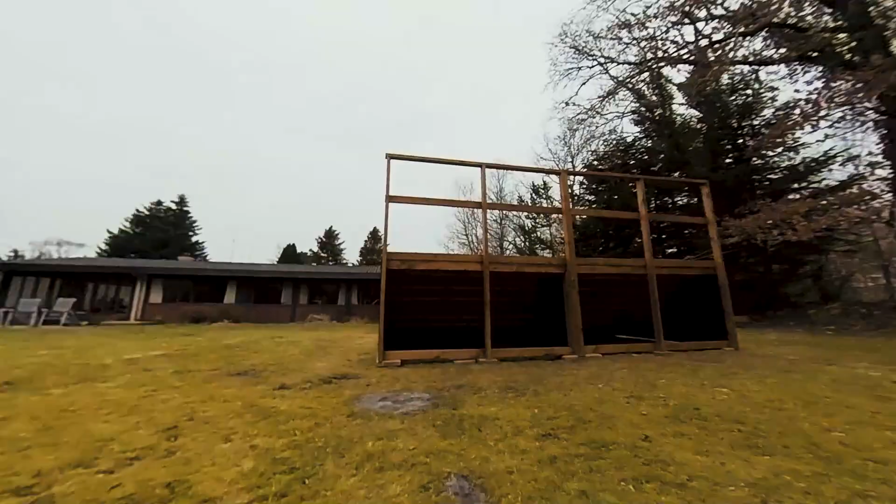On the last video on our channel you have seen the perfect mini ramp we built in our backyard. And in today's video we're going to show you how we build it. We have quite a lot of ground to cover, so I will put timestamps in the description if you want to jump into certain part of the video.

I will start with the plans and drawings, how I designed the ramp and why it is like it is. Then I will talk a little bit about the materials and how much money did I spend on what. We will talk about how to prepare the plywood and other material, what tools did we use.

We will talk a little bit about the foundation and then just continue into assembly, how we assemble the skeleton, all the quarter pipes, how we install the coping and everything about the plywood and finish. So stay tuned and let's go for the plans and drawings.

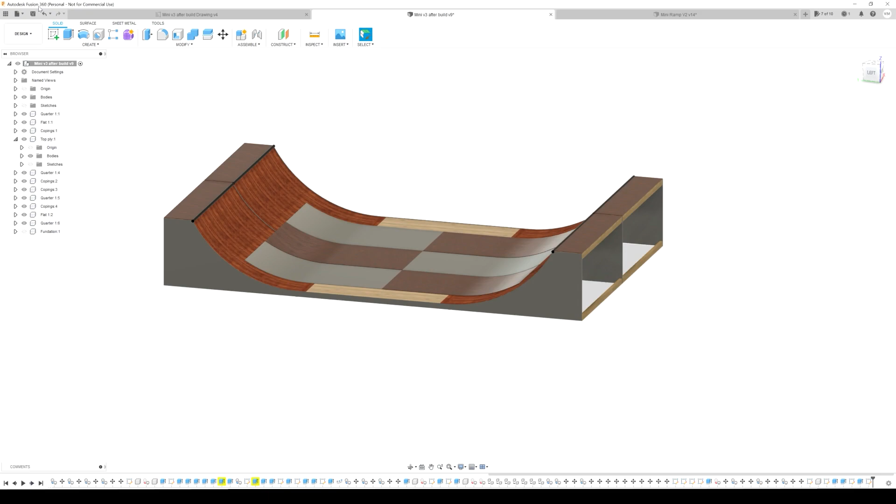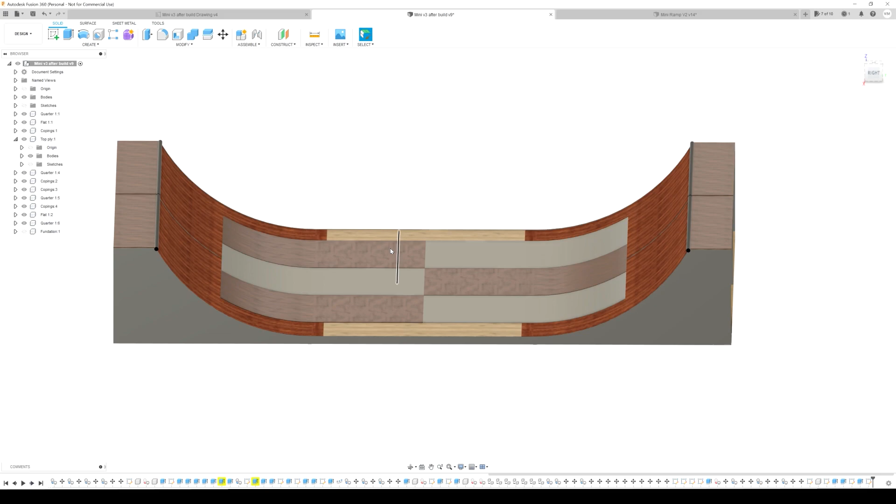So this is my plan of my ramp. You can make your plan with pen and paper or any other application. I use Autodesk Fusion 360 just because I'm familiar with this application and I use it for other activities and projects as well. If you want your ramp to be sturdy and stiff and last for many years, you will need to have a total of 18 millimeters of plywood covering the entire surface. So 18 millimeters here, 18 millimeters on the flat part and 18 millimeters on the platforms.

The platforms can be of different size, and actually in reality I have one platform bigger than the other, and I actually have even a bench made here as you saw in the video. These you can add on, so you can see that this ramp ends here and that platform is just an add-on which you can change to whatever size you like. So I'll just stick to the basics right now.

So how do you put 18 millimeters of plywood? Well, before you add any plywood on your mini ramp, you will have several decisions to be made. So first of all, you will need to decide how tall your mini ramp will be, what will be the transition radius, and also how wide you want your mini ramp to be.

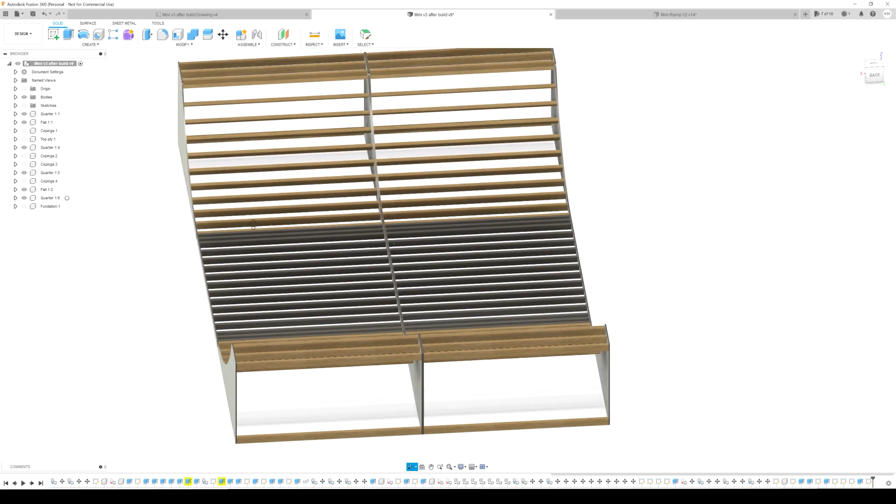So my mini ramp is made to be pretty soft when you drop in. It's not intimidating. It doesn't have any vertical transition right here, as you can see. And the circle radius is 2.2 meters. If you want your transition to be nice and soft, your transition radius will have to be more or less above 2 meters. 2.2 meter transition radius is the ramp that everyone can ride. Beginners don't find it scary. I myself pretty much enjoy it.

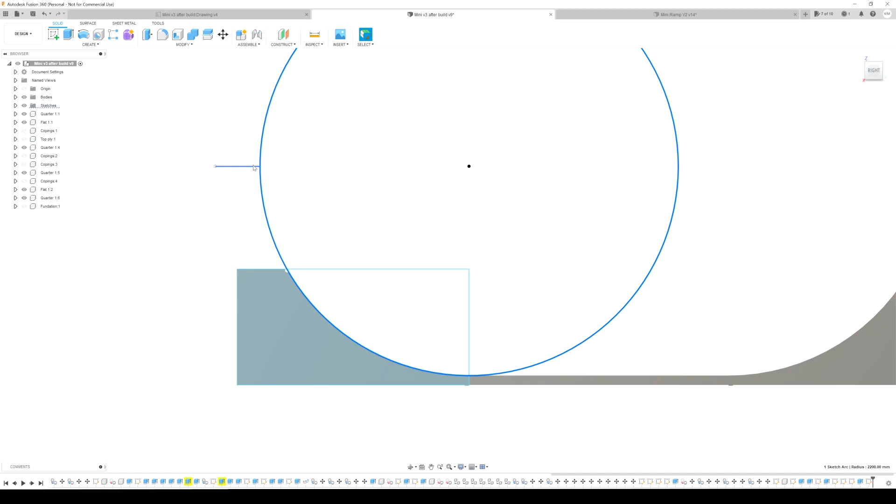I know that some of you would like to have it vertical, but then you will have to increase the height of the ramp a lot or go for a much smaller radius. So if you go with a smaller radius, then you can make this ramp work, but you have very steep transition. So when you define the height and the transition radius, then you can start thinking about how wide your ramp will be.

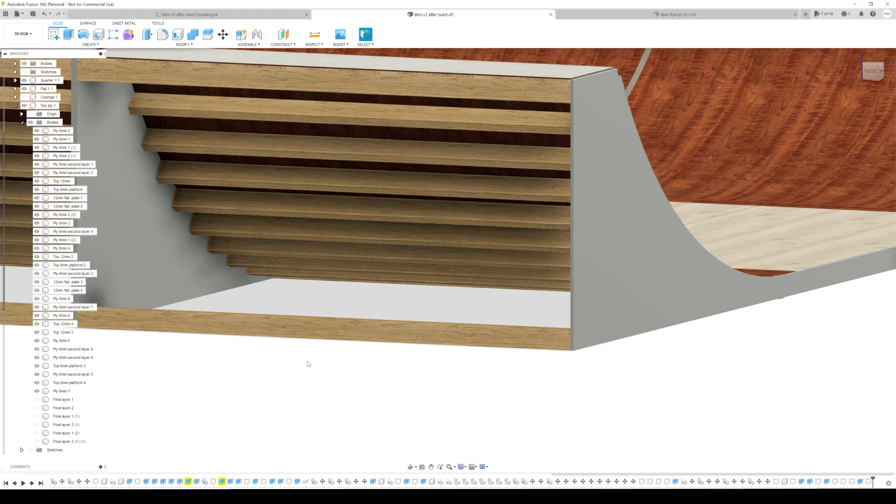The width of my ramp has been defined by the materials. I could get these in 2.4 meters long. I could actually get them longer, but I think this is reaching the limit of how wide you can go without making the ramp too weak or buying these much thicker, which would increase the price of the ramp a lot. And also the dimensions of the plywood. So the width of the plywood is around 1220, so two pieces make it 2440, and this is 2400, and this is exactly how I decided how wide my ramp would be.

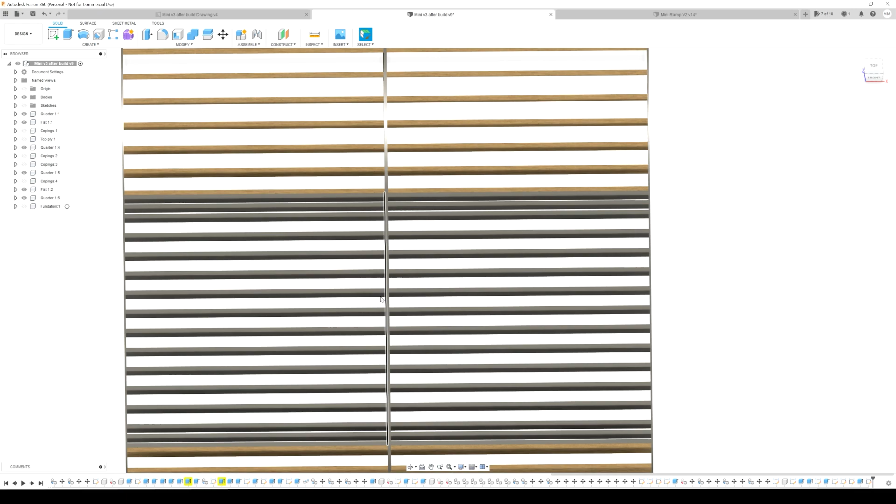One thing to remember when you plan for the width of the ramp and you calculate the material sizes, is that there are actually fluctuations in the plywood size and also in every other material. Another thing to mention, don't forget that the last layer, the final layer of the plywood, will have to cover also the walls. The walls for the transition for my ramp are built out of 15 millimeters of plywood.

So you will have two sections of 15 millimeter for every quarter pipe. So you need to add 30 extra millimeters overlap to be sure that the width of the plywood of the final layer is sufficient and you don't have a 15 millimeter gap at the end.

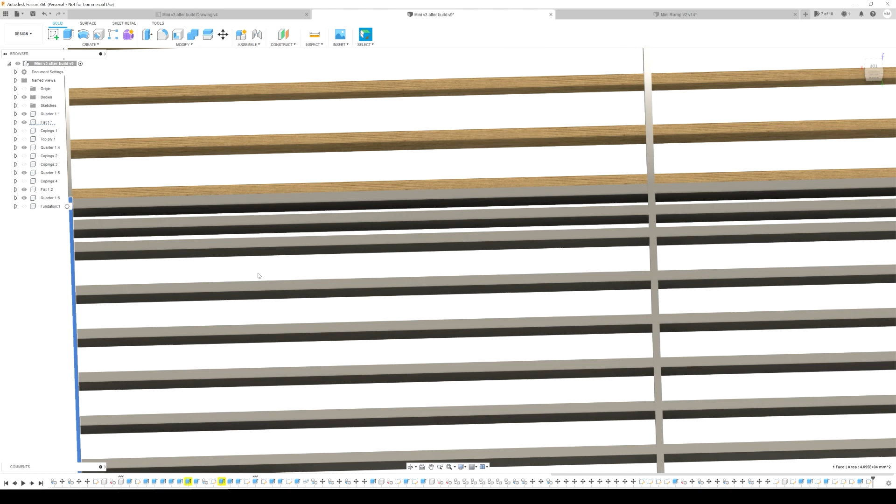Alright, so by now you have decided how wide your mini ramp is, how tall it is, and what the transition radius is. Now the next question you need to answer for yourself is how many of these horizontal planks you will need. You will definitely need one at the bottom for every quarter pipe. You will also need one at the other end right here where the transition ends, flush at the very end.

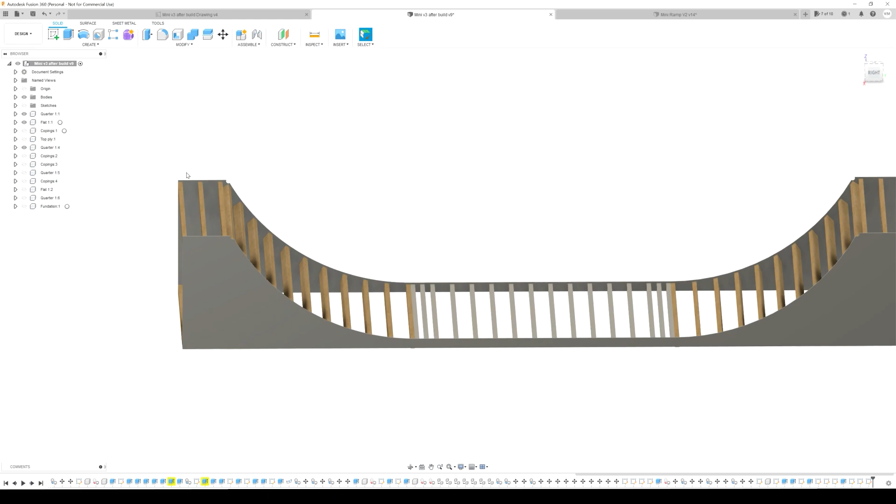And then we installed one every 20 centimeters, 200 millimeters between the centers of every plank, both here on the transition and also on the flat part right here. You might notice that there are some extra planks on the flat part right here and right here, and these were installed during the build of the ramp.

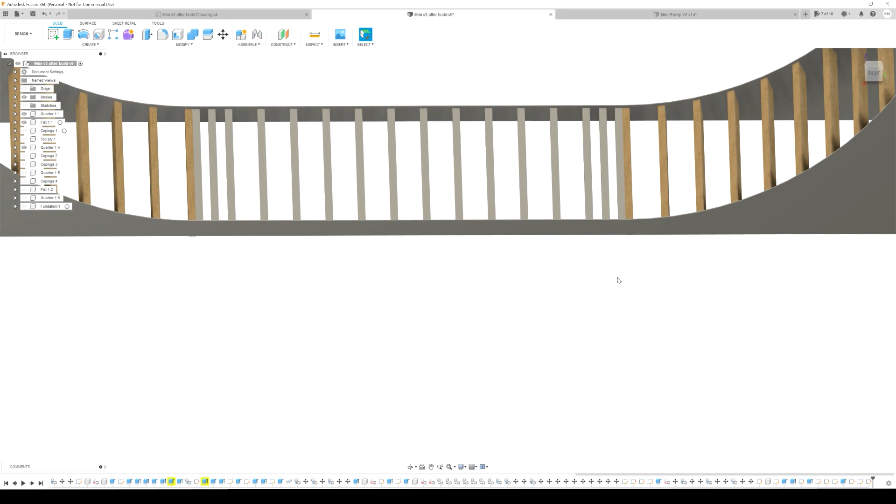I didn't actually have them in my plans, and we had to install them because this was the place where our plywood was overlapping. The sheet of plywood was coming down from the transition, and this is where it was ending. So we had to add something to put the screws in to fix the end of the plywood in place. This was bad planning by me, because I didn't know how we would install the plywood, but something to be mindful about.

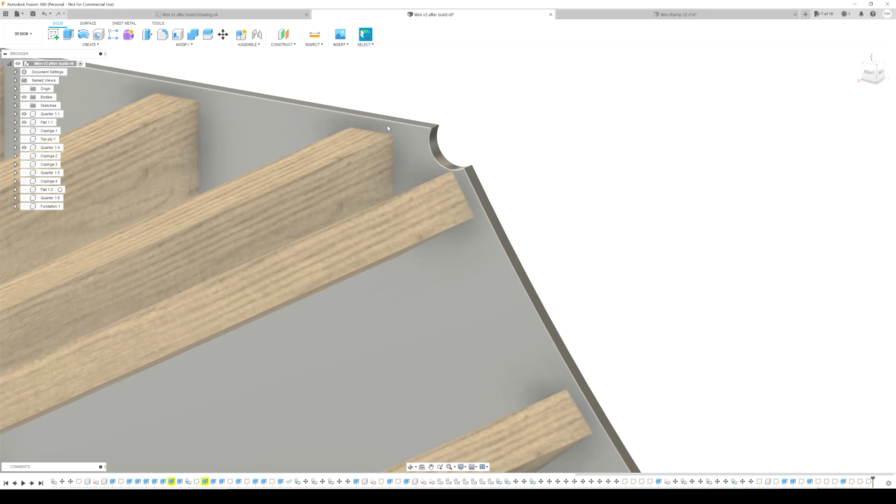Now let's go back to the topic of installing plywood and 18 millimeters of plywood. As you might be able to see already, all of these horizontal planks are installed 12 millimeters lower than the wall of the transition. Why not 18? Because the last layer of plywood will be going over the wall, and the first two layers or one layer of 12 millimeter will go here. For all of the parts that are flat and you don't need to bend plywood, we use 12 millimeter plywood, which then makes it flush to the wall.

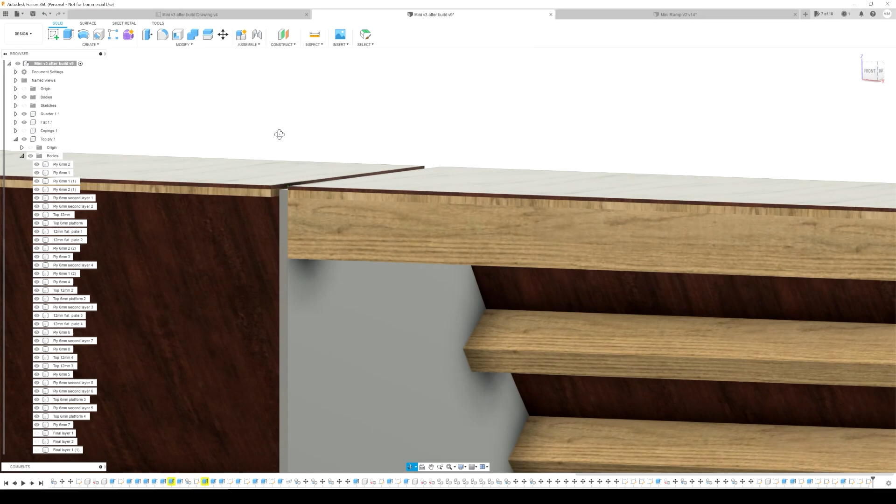So for example, if I just add the plywood, you will see that we have a 12 millimeter plywood plate just sitting here on the horizontal plank. And the same happens here on the flat part. You can see that we have it sitting here, and then it's actually flush to the wall.

Now on all the transitions, as you can see, we actually use only 6 millimeter plywood, just because it's so much easier to bend than the 12 millimeter one. And this is what I would recommend you do as well, go with 6 millimeters and 6 millimeters here, making it 12 and making it flush.

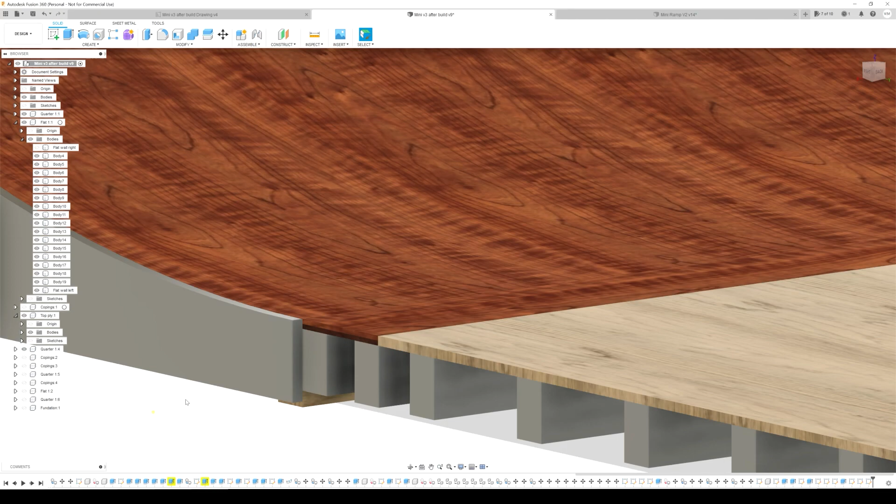Now when we actually installed it in reality, we encountered a problem because our plywood was not exactly 6 millimeters. We didn't measure it before we started the installation. It was actually only 5.5. So we had this wall sticking out around 1 millimeter, and we couldn't add the top layer. We had to sand it all down with the angle grinder.

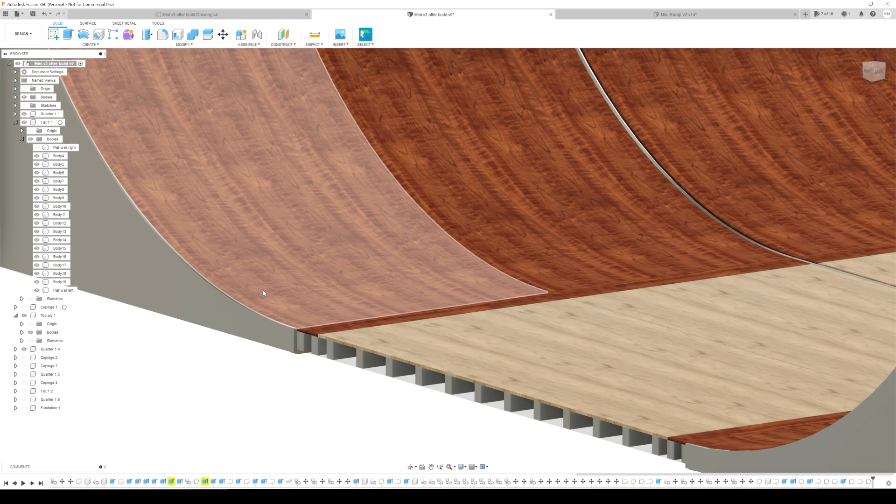So if that happens, you need to make sure that it's flush. Maybe it's less of a problem here at the edges, but definitely a big problem here in the middle, because if you add your final layer of plywood and something is sticking out here in the middle, it won't be good. You will probably break the plywood.

So all in all, you will have 2 times 6 millimeter plywood here, and as you can see, I actually used 1, 2, 3, 4 plates 2 times on the quarter pipes, and 12 millimeter plywood here as the first layer, and also on the platforms a 12 millimeter layer of plywood.

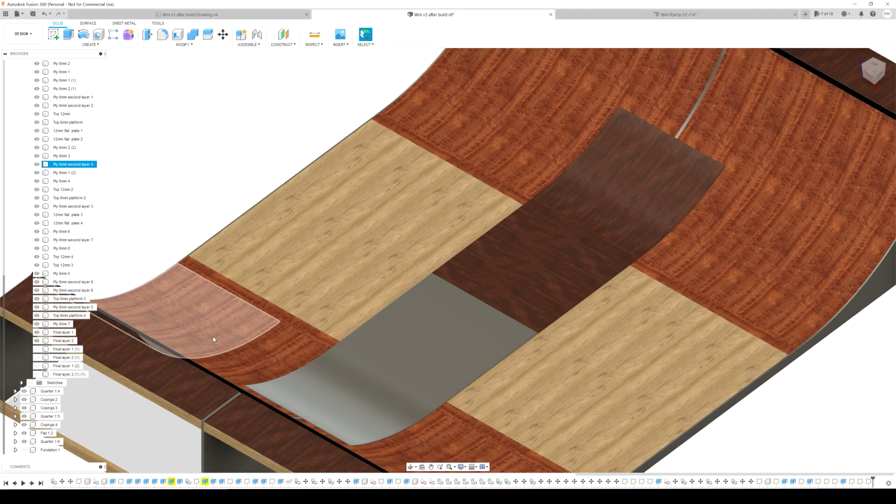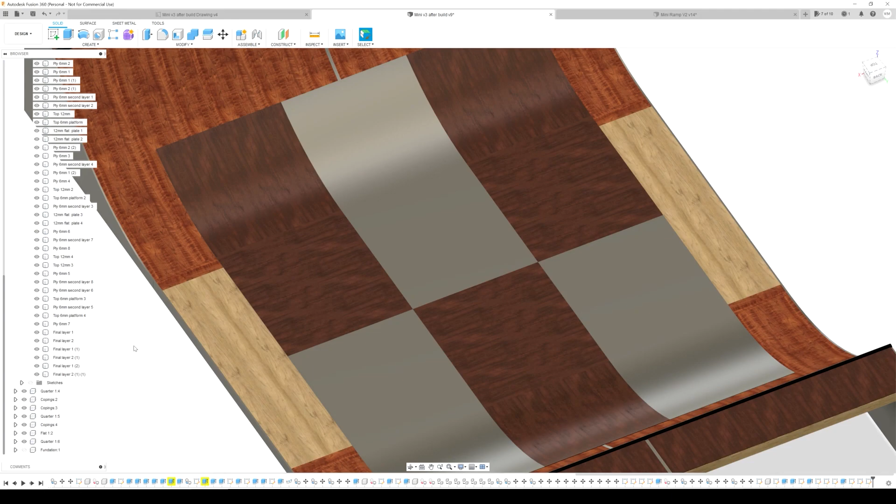And then for the top ply, we used again 6 millimeter hardwood plywood, and we started laying it down here in the middle, just like you see right here, really trying to make the first one centered in the middle and also make them flush with each other, because the more skewed you put the first ones, the more they will go sideways on the final ones. So we installed it like this, and these were full sheets of plywood, and then all of the ones that went on top here and on the sides had to be cut.

And it's important that you actually do that, because as you can see, the joint of the plywood is here, and this one is overlapping it. So you have to overlap it both in length and in width to make a strong structure when you build your ramp.

So right now we are looking at the list of materials that I used to build this ramp, and also immediately jump to the pretty much most common question: how much did that ramp cost? So all in all, I didn't have to pay anything for the tools, and I didn't have to pay anything for the work. It cost me around 3,500 euros. I live in Denmark, where everything is extremely expensive due to very big taxes.

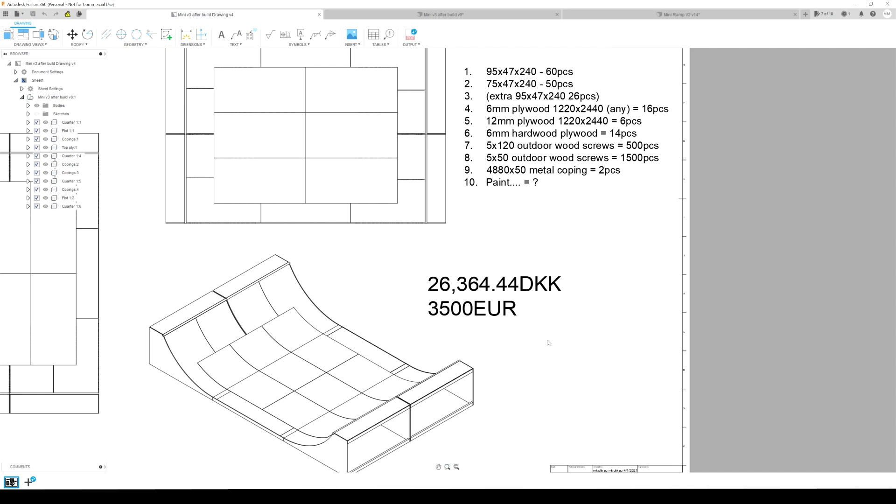I believe that anywhere else in Europe, and even more so anywhere else in the world, you can build it much cheaper. The materials are really expensive here, but you need to make your own list, make your own shopping cart online somewhere, and make an estimate. After you have a plan, it's not such a big deal. I was actually expecting to finish the ramp for 22,000 kronas, and I spent an extra 4,000 on unexpected things, which I will cover a bit later. But so this is the key list of the materials.

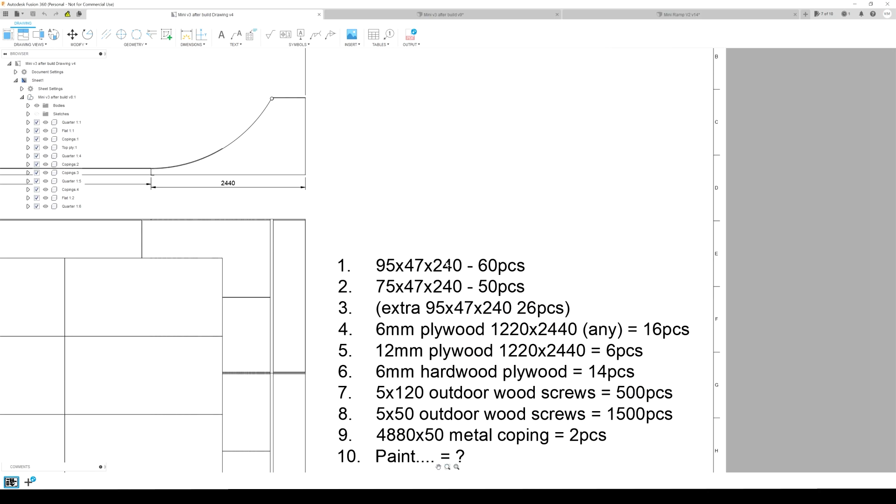The horizontal planks that I used were 95 by 47 millimeters. One important thing to mention is that these horizontal planks need to be vacuum impregnated with an agent. They need to be water resistant, and they will last much longer, especially in wet climates. And they were 240 centimeters long, 2.4 meters long. And I had to use 60 pieces of them. So I had a plan to use the smaller ones for the flat part.

Let me just get back into the drawing. Because we made these side walls smaller, I was expecting that I can use smaller horizontal ones here, but actually I ended up using all of them in the same size, 95 by 47. I just had to lift up the side wall a little bit so that the planks were sticking out like this, and my ramp is now standing on them, on the foundation, instead of sitting on the wall. So you would see all of them right here, just because I actually used 95 by 47 or by 50, you can find them, all 110 pieces.

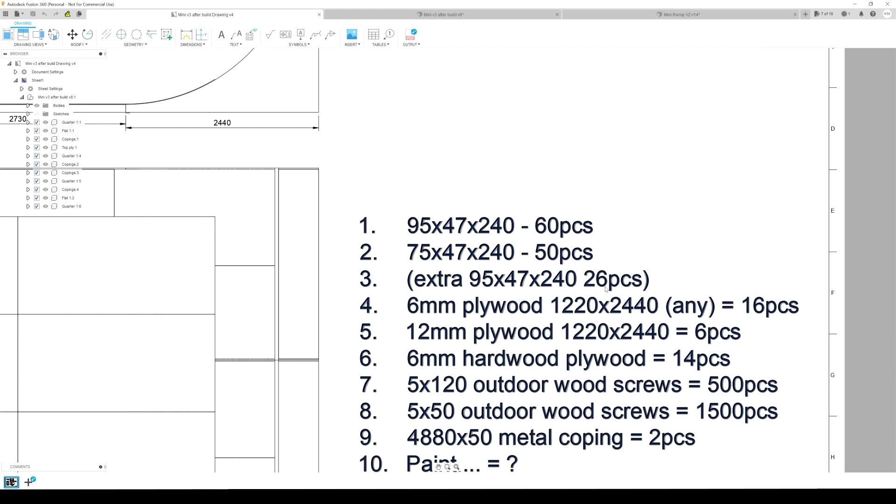Now I also added an extra 26 pieces here, which I used for the fencing. And you can see the fencing in my video, and also for the extension of the platform. So all of this fencing, and the platform, and this platform is, by the way, 1.2 meters wide, and also the little bench. If you want to build those, you will need some extra, so I had to order an extra 26 pieces. Actually, we used all of them, and I would probably use 2 more, just because I would need an extra one here right now, which doesn't exist. Let's continue on the material list.

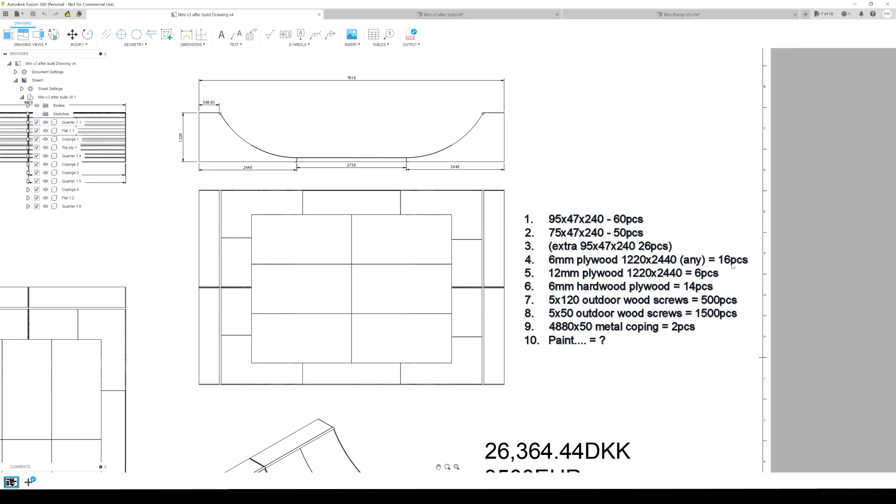You will need 6mm plywood. This is the standard size, at least in Europe, which you can get. And I put any plywood because you need 16 pieces for the first and second layer on the transitions. And it can be any plywood which is 6mm. And the same with 12mm plywood, so you will use 4 plates, 1, 2, 3, 4 right here. And I used a couple more plates for the platforms on the top. So you will need at least 6 pieces.

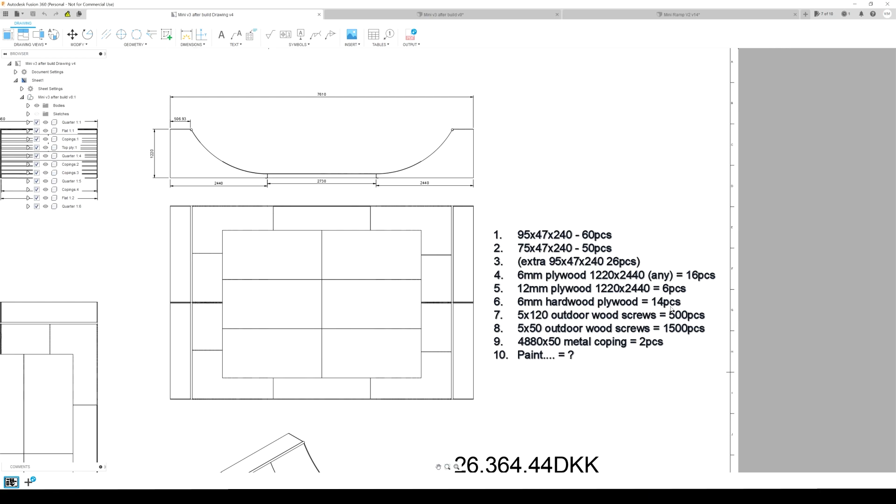The next, number 6, is 6mm hardwood plywood. So this is the plywood that you can maybe opt out of and use Skatelite, which will last longer and be stronger and so on. But Skatelite costs like, I don't know, 10 times the plywood. So to take like 14 pieces of Skatelite to cover this ramp would cost me another 2,500 or 3,000 euros. So it's like half the price of the ramp.

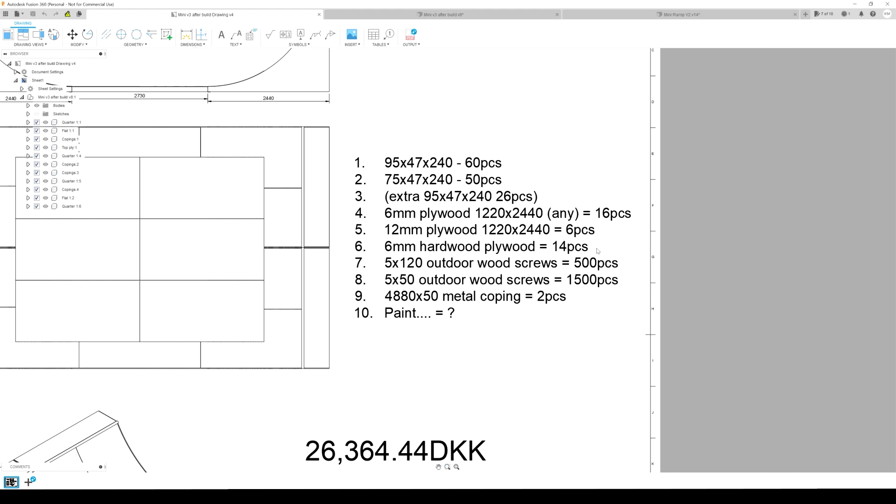And that's why I just went for a hardwood plywood, which is called waterproof plywood because the glue is actually water resistant. So the glue is not affected by the water, and also the surface is hard, so it can be birch or any other hardwood plywood that will last longer than the normal pine one, which is the cheapest one.

Now for the screws, I am actually not sure about the number of the screws right here. I had to actually go out and buy a little bit more of the long ones, 5 by 120. You want them to be wood screws, and they need to be rated for outdoor use, so they don't have to be stainless steel, but they have to be rust proof.

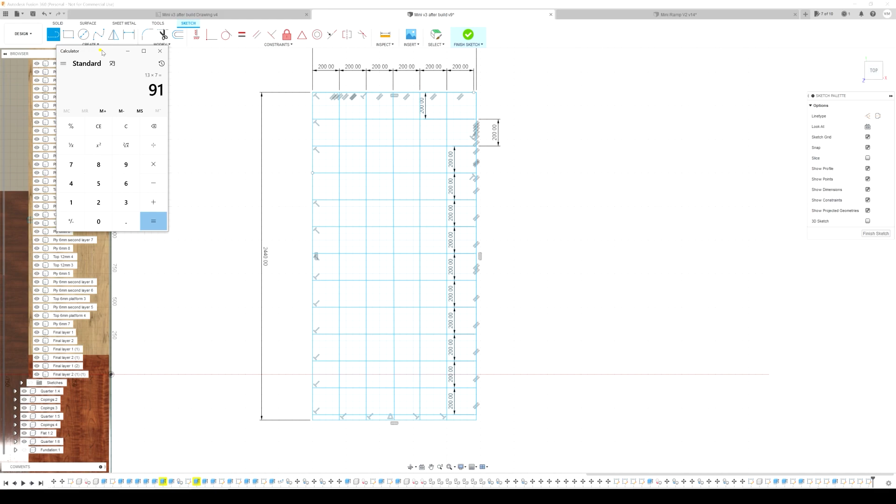And plywood screws, we can quickly estimate right now. So I just quickly made a mock-up of one plate, which is 2440 by 1220. And I put the lines every 200mm, every 20 centimeters. So we can quickly estimate, we have 13 by 7. You will need around 91 screws per one top plate.

We know that on the top surface we will have like 16 plates, so you will need 1450 screws. So actually when I put this estimate of 1500 here, I think I will add a bit more, because you will need some of them for the base layers of the plywood, and you will also need some for the platforms, so better be on the safe side. You actually will need more.

And also here I believe that you will actually use more screws, especially if you are building the fencing around and the platform. If you're not building a platform, 500 might be enough.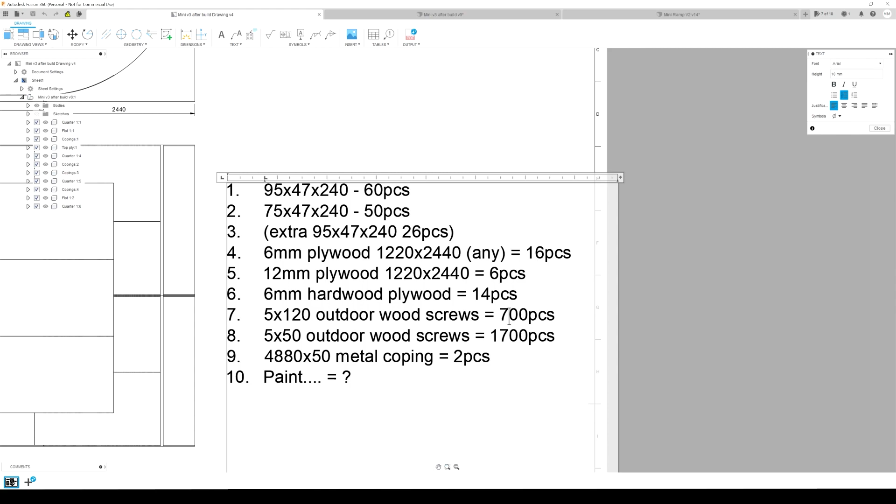Alright, and then of course you will need some coping. I needed 2 pieces of 4880, that's the width of my ramp. It's 50 millimeters in diameter, and you need them for both sides of your ramp. One for this side and one for that side. So this is more or less the material list that you need.

And last but not least is the paint. I painted my ramp with something called Gori 502. It's a water-based paint, but that has some oil, and it's a transparent one. It shouldn't make a film on the top. But I actually painted the ramp 3 times.

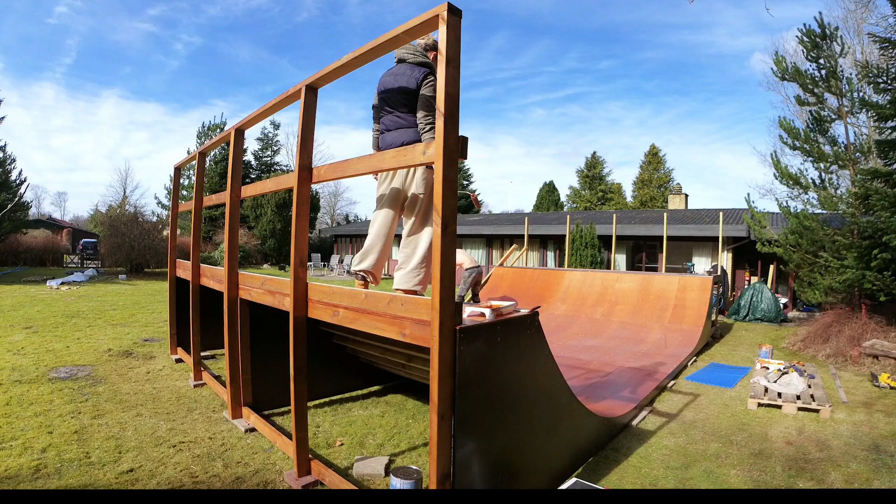I don't want to recommend the paint that I used just because it made my ramp a little bit more slippery than I want. I need to use the grippiest wheels I can, and it's still a little bit sketchy. And this is the reason why I just don't know what is the best paint to use.

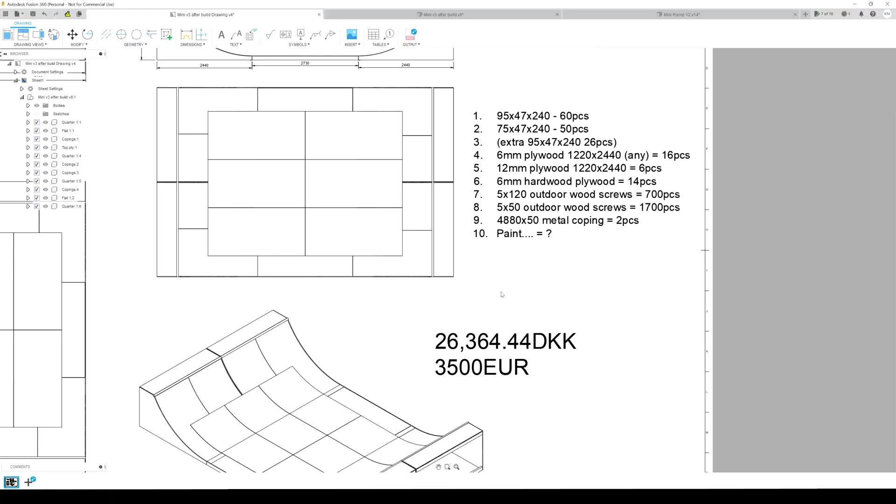If you use something like complete oil paint, which makes a film on the ramp, it will be super slippery to skate. So that's something to consider, something to experiment with. Maybe you don't need 3 layers of paint, maybe 1 layer is sufficient, because 1 layer makes the paint pretty rough. 3 layers makes the paint pretty slippery. So that's the list of materials, guys.

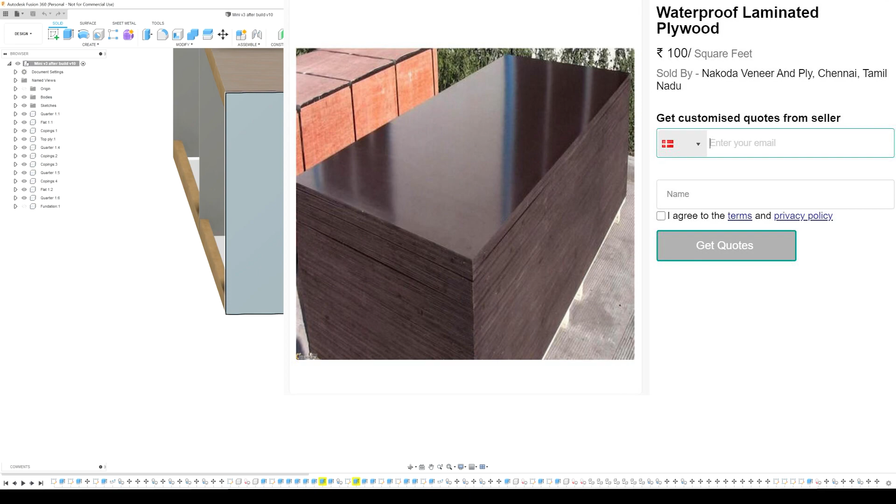But it actually isn't, because I didn't include the plywood that you need for the transitions to cut these sections here. So you will need 1, 2, 3, 4 and 4 on the other side. You will need 8 transitions to cut out of the 15 millimeter laminated water resistant plywood. So this is completely different plywood. It's also thicker. Needs to be 15 millimeter, as I said, and it's completely water resistant.

Also, you will need some for the sides. Now, how much you need of it will depend completely on what size of ramp you are building. This is one standard sheet of plywood. If you make a smaller ramp, you might actually cut 2 transitions out of one plate. If you make a bigger one, you will probably need the entire sheet for one and then some extra for the sides.

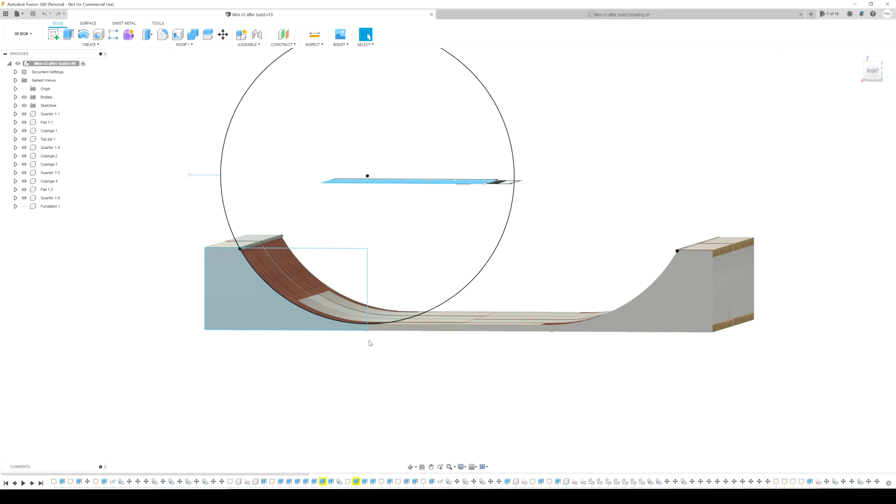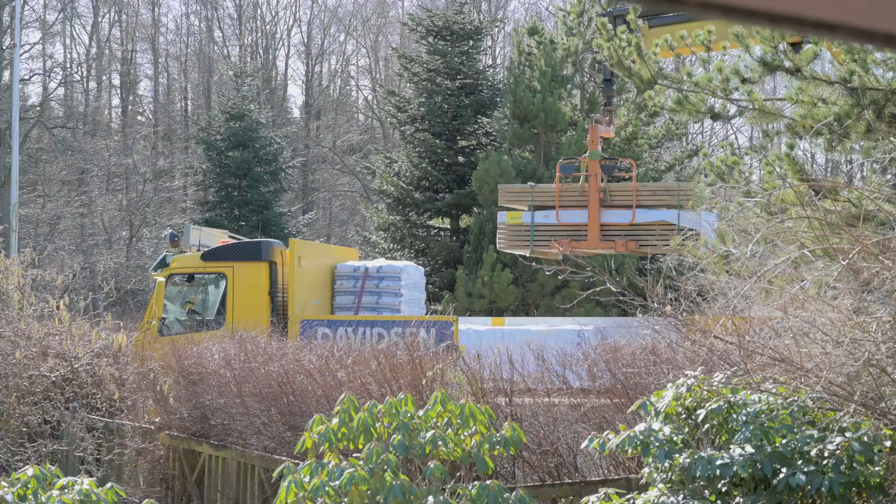Do not underestimate the amount of materials that you will need for a ramp of this size. It's quite a lot, it takes some space and it takes some effort to carry it from one place to another. So get some help if you can, and don't think that you can just order everything one day and have it all placed the next day, because I was quite surprised by the amount of materials when they all arrived.

Alright, so this is how my workshop looks now. And it's not even half of the plates. I need to paint them from both sides. And of course my garage.

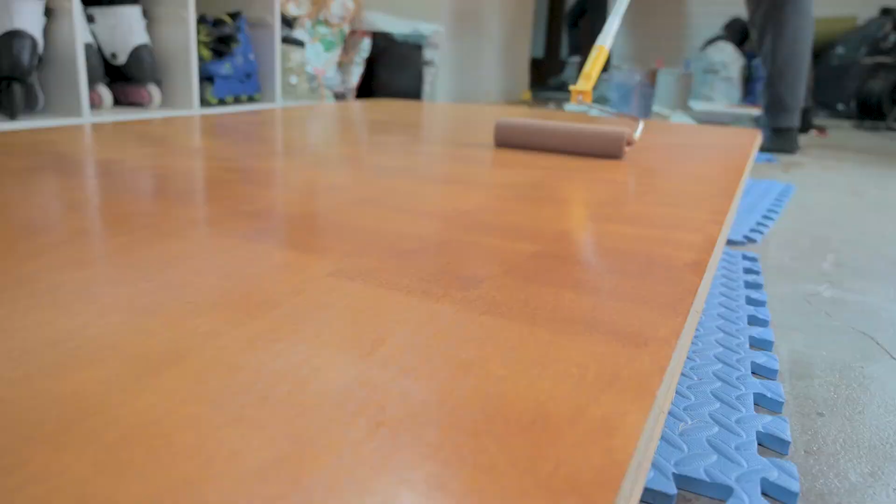Painting all that plywood 2 times from both sides takes a tremendous amount of time, and you will need a tremendous amount of space to dry it, unless you live in a very sunny place and you can just do it outside. As you know, we live in Denmark, where the weather conditions are, let's say, a little bit more wet.

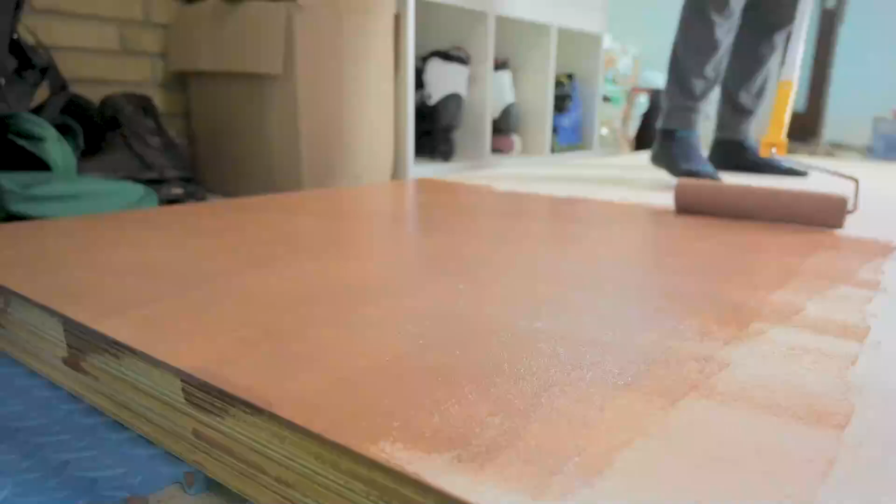And I'm super happy that I had this big workshop, so I could paint all the plywood with the roller in the horizontal position and then just store them for drying vertically. When they dry out, I flip them, paint them all again and stand them up.

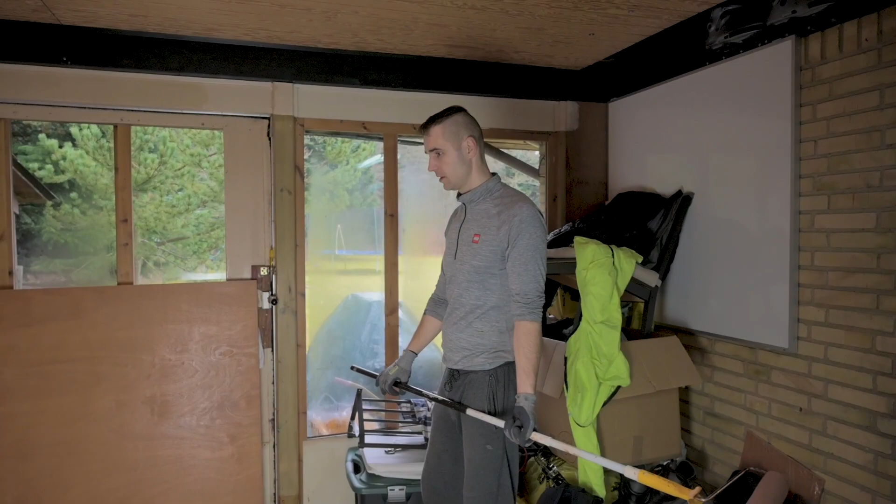Painting them in this way took me about a week to have 2 layers of paint covering all the plywood before the assembly. I honestly believe this is the hardest part of building the ramp. To paint all the plates 4 times, or 2 times from both sides. Oh my god. 6 days. Done. Now wash all the stuff.

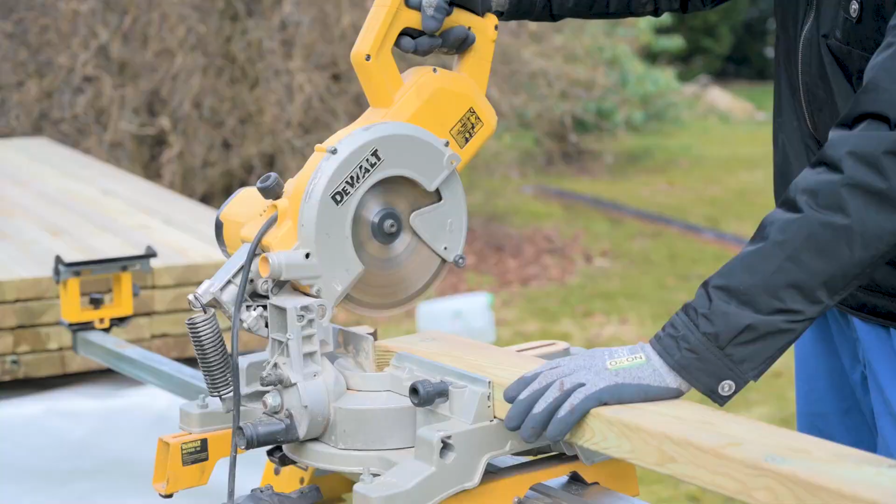If you have already decided about the length of your horizontal planks, meaning the width of the ramp, you can pre-cut the planks. Mine were ordered as 240 centimeter long ones, and they came in 243, 244. So I had to cut them in 240 one by one.

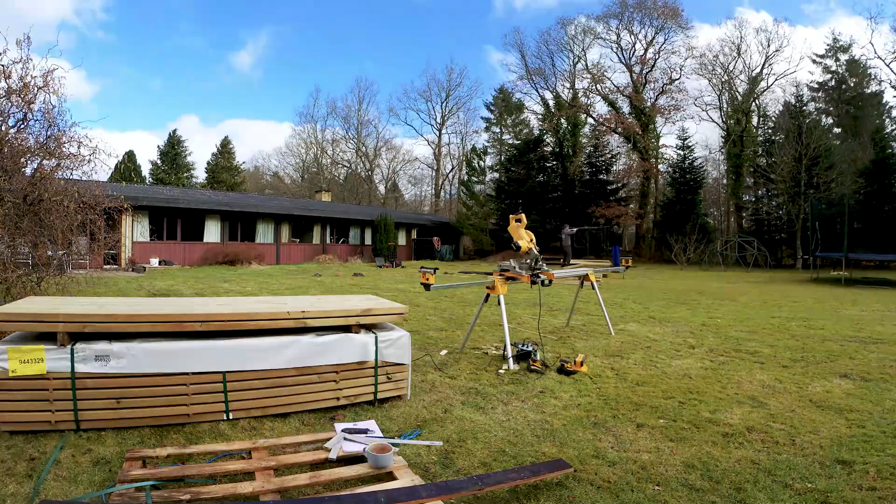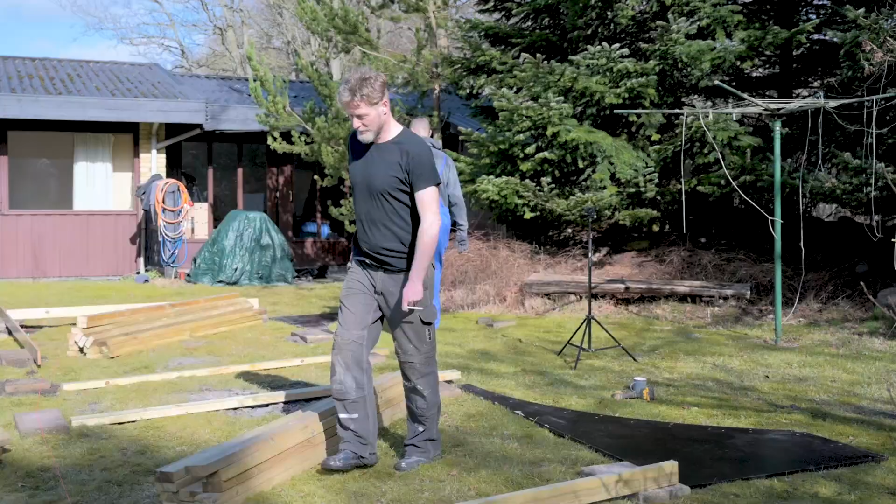And the last but not least step is to actually cut out the transitions for the side panels for the quarter pipes. I got mine CNC cut in the factory and also holes pre-drilled there, so I cannot give you any advice on how to do it or any tips. I just purchased them pre-cut, and when you finish with cutting your transitions, you're good to go and start building your ramp.

We used quite a bit of tools for building this ramp. First of all, you will need a saw for cutting the horizontal planks. You will need something like a circular saw for cutting the plywood. We also used a couple of electric screwdrivers, and of course don't forget to get the Torx bits for them. You need a drill with a bit for countersinking the screws.

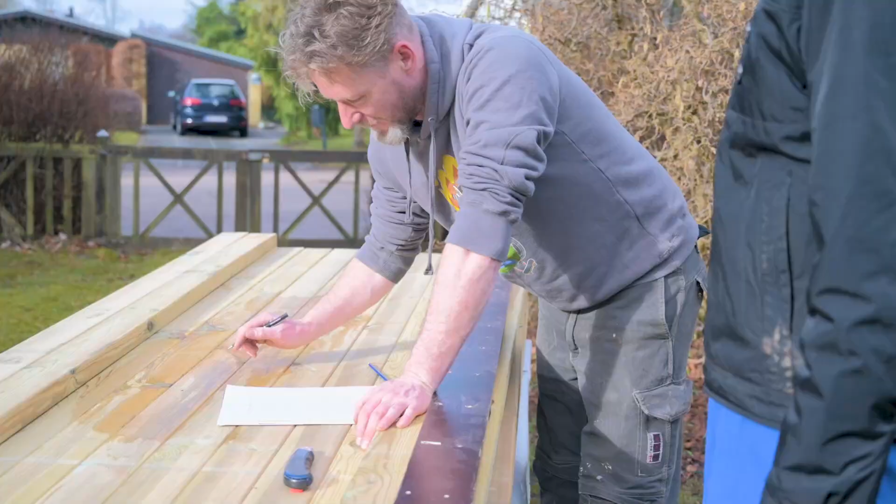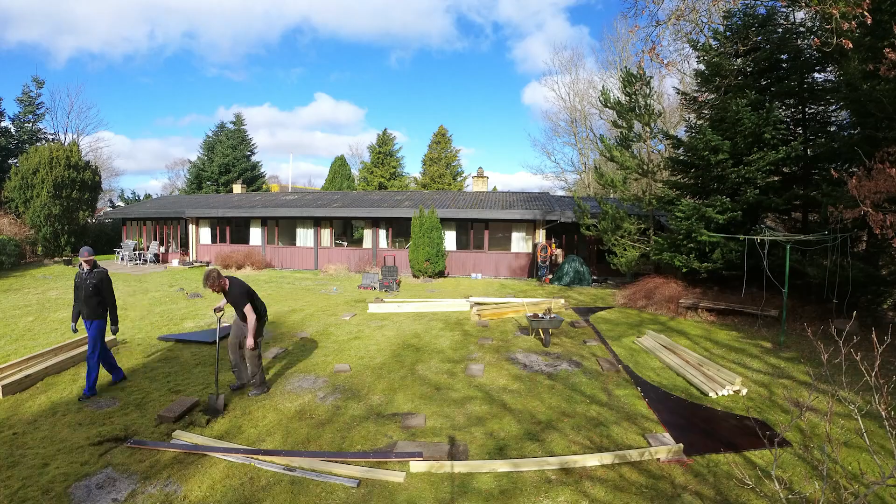You will need things like a carpenter's pencil, wooden meter stick, measuring tape. A rubber mallet is very useful for getting the plywood in position. You will need a long level for leveling the foundation for your ramp. You will need a chalk line, colored thread, maybe some clamps. On top of these essential tools, we also used a welding machine for installing coping. We also used an angle grinder, fine cutter, and a shovel.

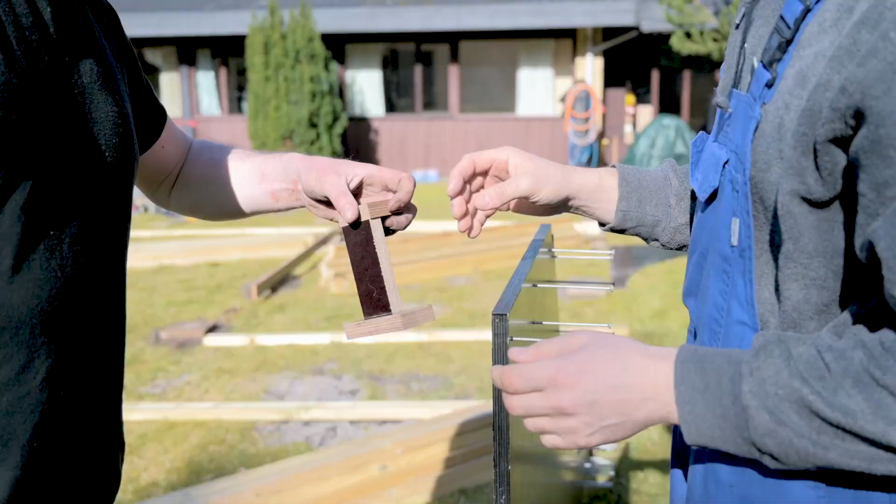There is one more tool which is necessary to make yourself. It will make your life so much easier when installing the horizontal planks. Special tool, just place it here and make sure that we get the 12 millimeters that we need here to put the top layer, the platform in. And we use this one, just make it flush with the back edge.

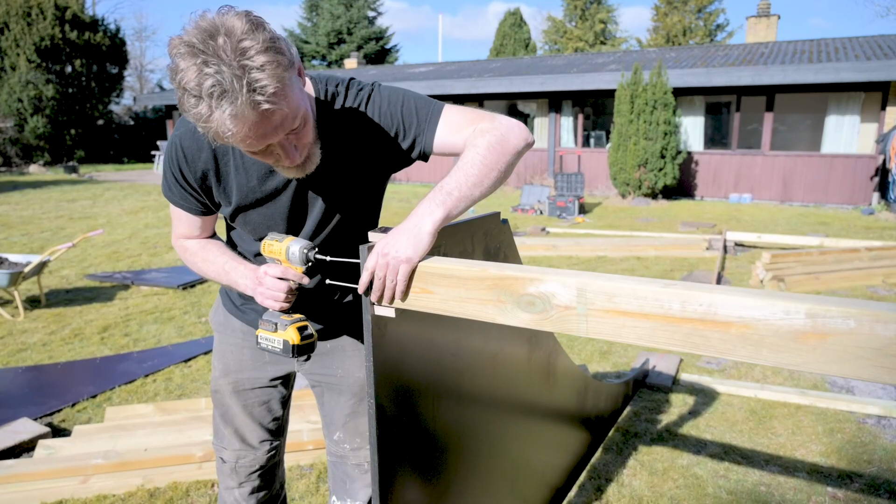You can say that's a simple Z shape. You just have to make sure that the longest part of this tool is 12 millimeters longer than the height of your horizontal plank. This will make installing the horizontal planks at the same level so much easier than trying to measure it every time with each and every one of them.

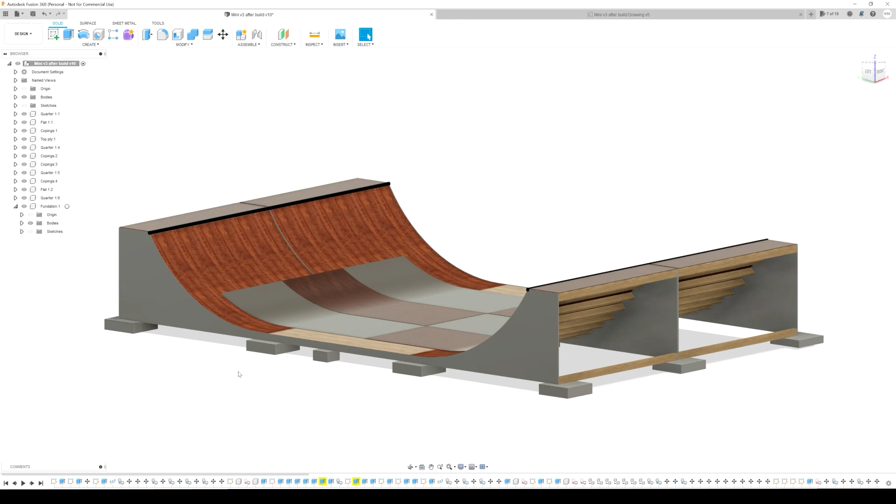The foundation of the ramp serves two purposes. First of all, it gives you an even ground to place your ramp and make sure that it's straight. And the second one, it lifts the ramp up from the ground, allowing the wood to breathe and not rot standing on the grass or any other surface.

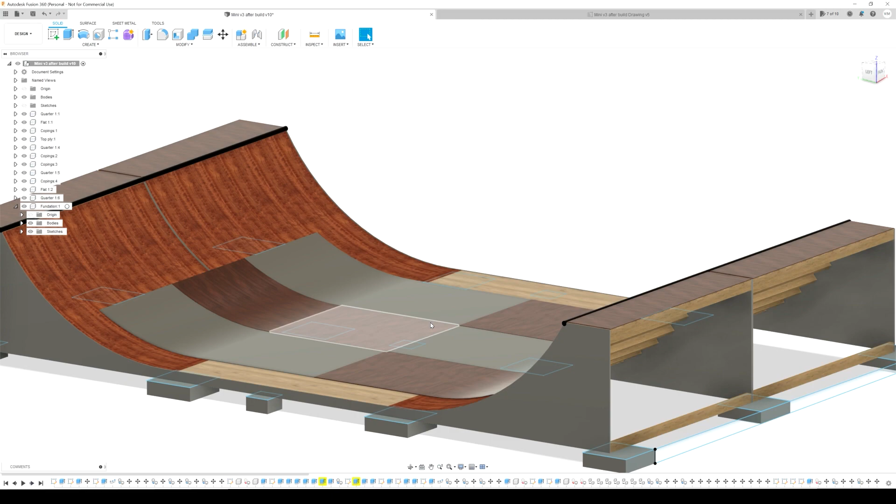Now, if you look at our foundation, that's basically some concrete tiles or bricks or whatever you like to call them. And you might already notice that on the left side of the ramp, the brick is taller than on the right side. In actual fact, it's a 4 centimeter difference that we intentionally built in when building the ramp, to make sure that the water is not standing on the ramp, so that there is no big pool or puddle in the middle. And when it's raining, the water will all go down to the right side.

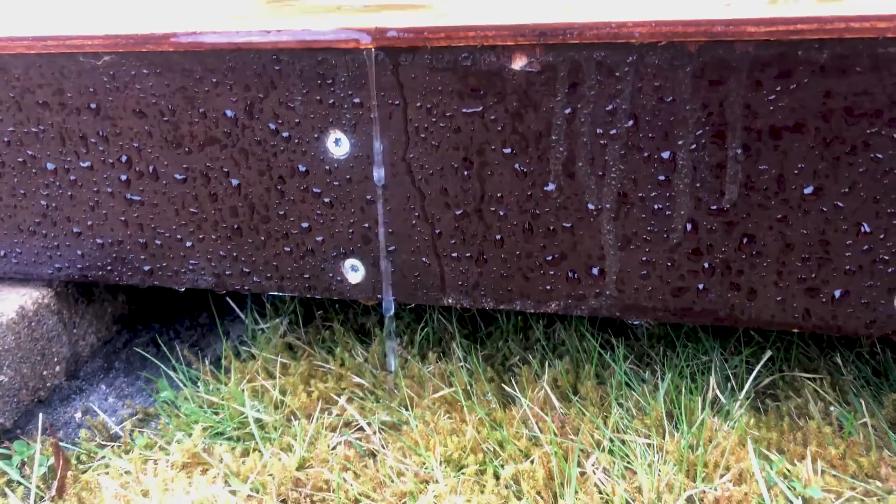And yes, it means that the coping is also going a little bit down, 4 centimeters difference. So it's a bit easier to grind to the right side if you go from this side of the ramp, and a bit easier to grind to the left side if you go from this side of the ramp.

For the ramp, we aim to have 4 points for every quarter pipe. Then of course 2 quarter pipes that are next to each other would share the ones in the middle, and the front ones would also share the same bricks or tiles with the flat part. And of course we put some extra support for the middle of the flat part.

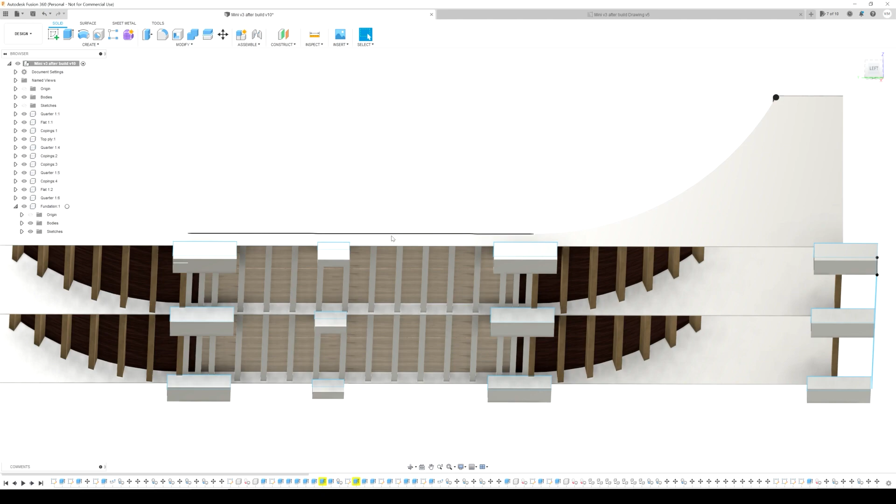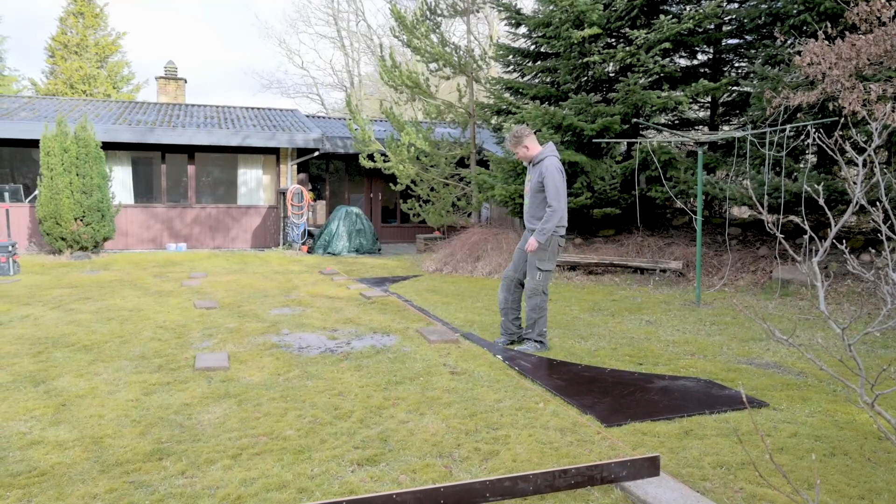So the amount of tiles can be different depending on the height of your tiles and how high you want your ramp to be, but you need to support at least every corner of the quarter pipe, every corner of the flat part, and if the flat part is long, you also need something in the middle. You can see that Alan is using the bright colored thread to make sure that all the bricks are lined up in one line. So you choose your first corner of the ramp, lay down some bricks, and then make sure that they are straight.

The next step is to try and level the ramp with this mentioned 4 centimeter difference. So for that we need to use the long level. If the tile is too low or too high, we would dig with a shovel or just add some soil and try to make it to the level that we need. And continue going through different corners, making sure that all the tiles are aligned and at the same height as we need.

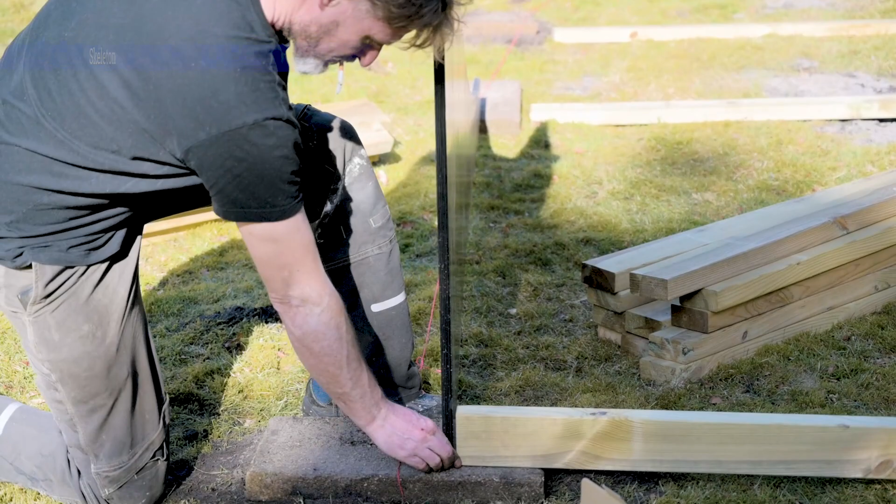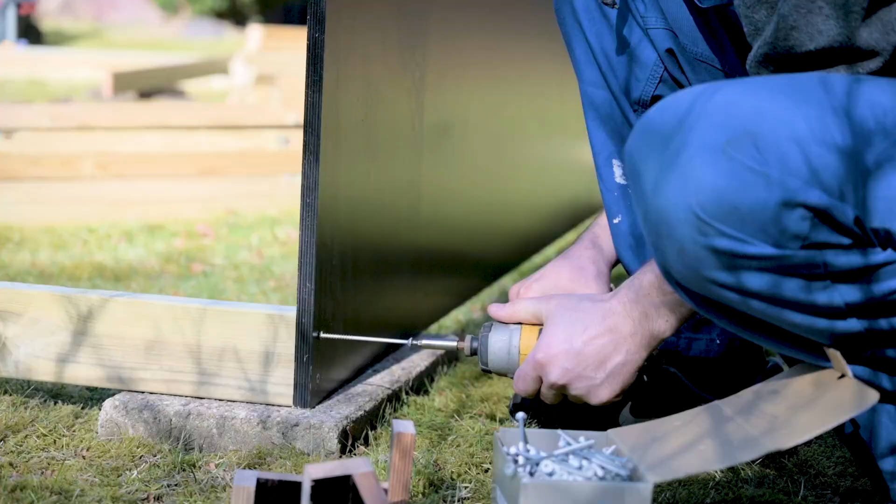If you have your materials ready and you have a level surface to begin with, you can just start by connecting the first horizontal plank with the bottom rear corner of the first transition. After you do that on both sides, you can start preparing your screws. Just put the screw in every hole which was pre-drilled in the transition and get ready to add the horizontal planks.

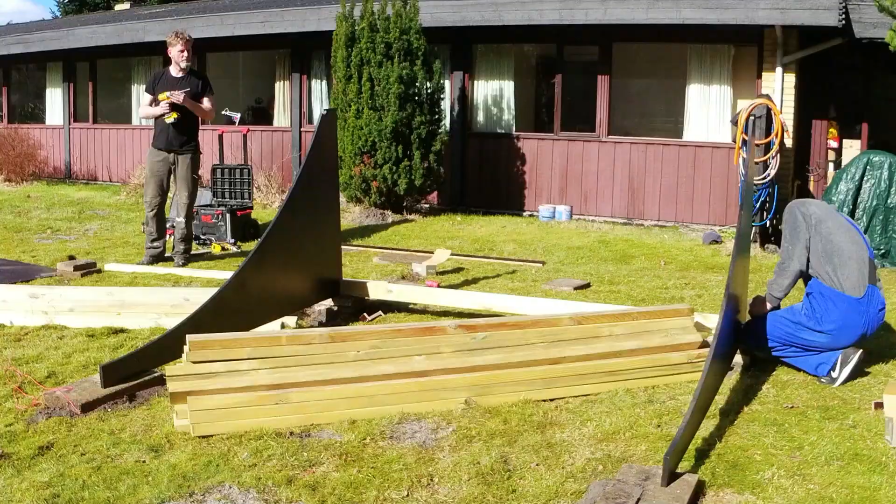This is where the self-made Z tool is just so comfortable to use. It takes no time, you just put the tool on the transition wall, put the plank on it and screw it. I would recommend being 2 people with 2 electric screwdrivers. That will increase your speed dramatically. You continue in the same manner until you build all your 4 quarter pipes, and you do the same with 2 flat parts. Just don't rush to connect it all together.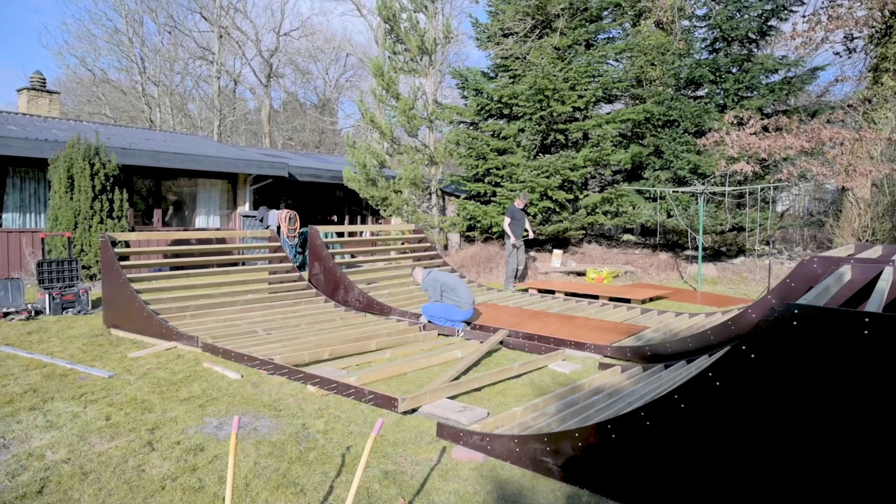As you can see now in the footage where Alan is standing, we have connected the first quarter pipe to the first flat part to the second quarter pipe. But we do not connect the quarter pipes that will stand next to them, and we do not connect the flat part that will stand next to them. I found that building the skeleton is the most satisfying part of the ramp build because the progress is very quick, you can see the result immediately, it's not hard and it's great fun.

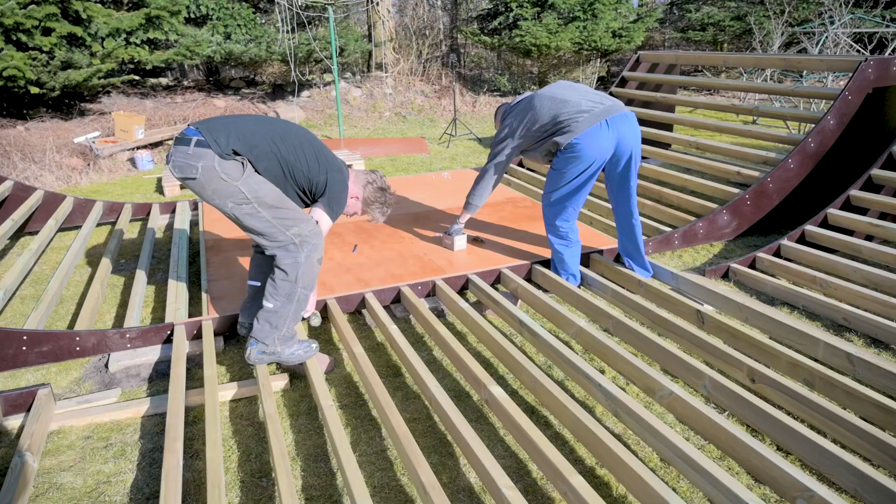The reason not to install the flat part or the coping that is next to the first flat part is because you want to install these 2 sheets of plywood first. And then you might need to actually loosen the bolts on the side of the flat part, so you can actually screw them back together and squeeze the plywood so there is no gap in between.

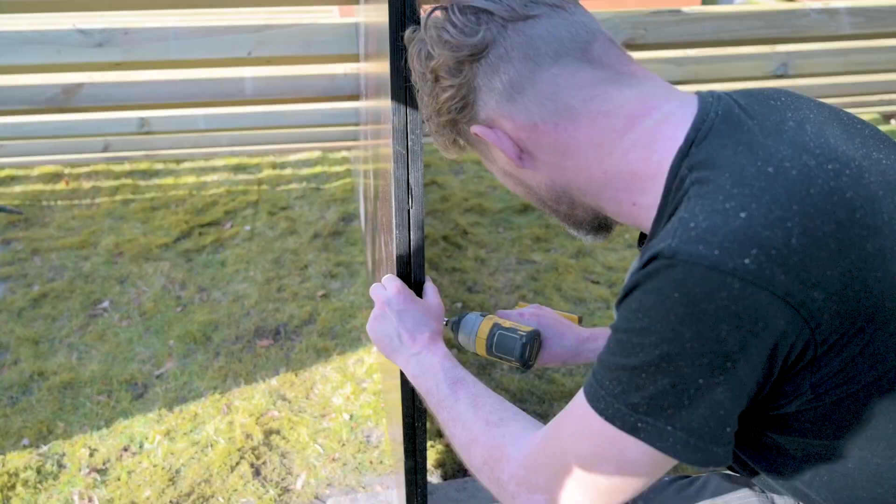After the first flat parts of plywood are installed, you can continue and join all the quarter pipes and flat parts together into one big piece. We actually even added some sheets of plywood because we didn't have coping on day 1 of assembly of the ramp, but I would recommend against that. When you finish putting all the skeleton together, now it's time to install the coping.

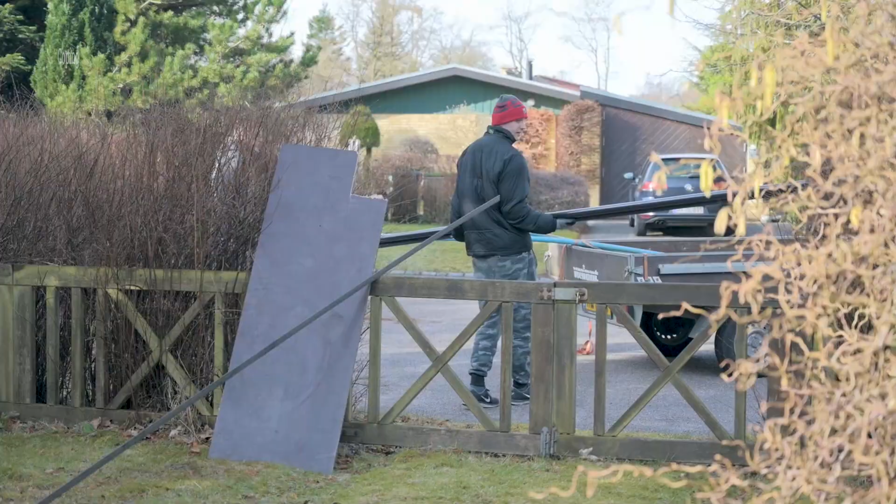Now the key reason why I recommend first installing the coping before any plywood is because before installing the coping you actually need to check if your ramp is still straight, and if it's not you need to correct it, and we actually had to do that. Remember all that dirt that we used for leveling the tiles?

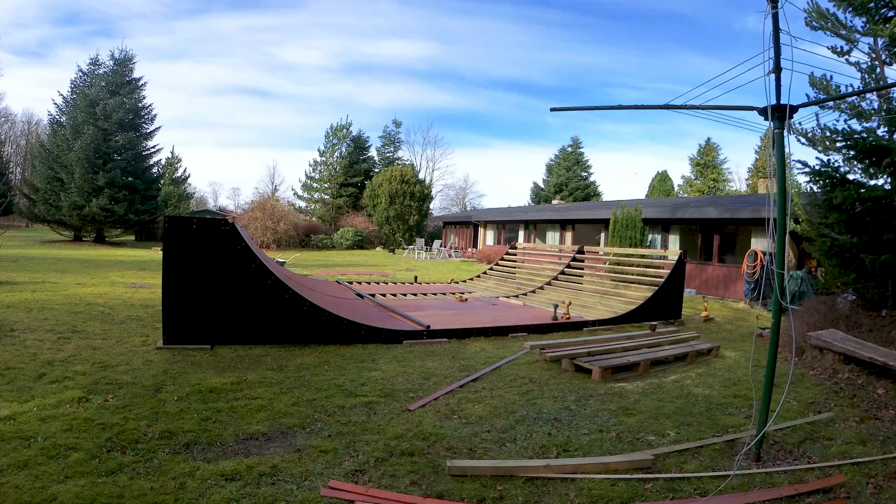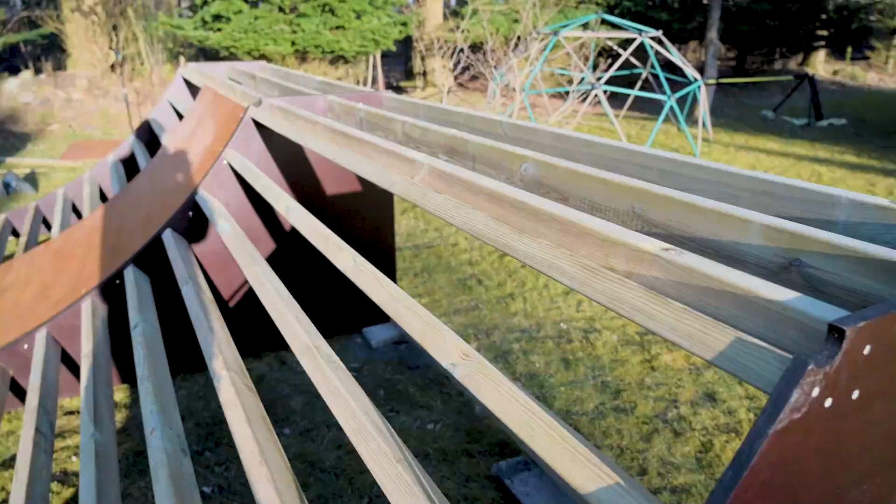Now it's settled down over the night and also because of the weight of the ramp, and we noticed that some parts of the ramp are not even and we couldn't actually install the coping because we had this huge gap in the middle. So we had to lift the middle of the ramp, one corner, other corner, and make it all straight again.

Alright, so one small complication that we have is these ones. We have to cut it at an angle here because otherwise the coping won't be flush. And we want to weld the little metal plates on the coping. So we have to cut this at an angle. So that's one of unexpected things, at least for me.

There are at least a million ways to install the coping on a quarter pipe, but we decided to stick with welding on metal plates and connecting them to the plank. We had to have this plank, which is at the bottom where I'm holding my finger on, underneath the coping all the way so that it doesn't bend when you grind it. It's super important to have something supporting the coping from the bottom. But I think that it works pretty well, so we installed these 2 to hold the coping just around here with some metal plates. Should be nice and strong.

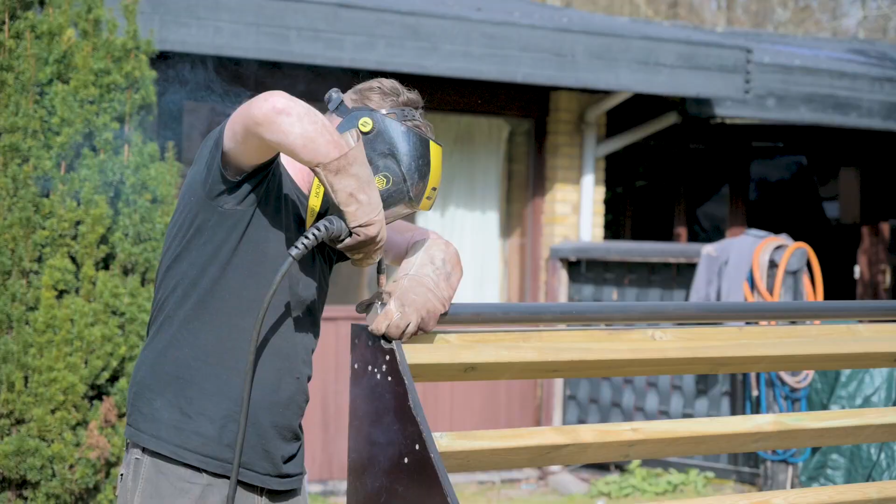Today, after skating this ramp for more than 10 times, I can confirm that coping is really solid, it stays in place, it's rigid and it's fine. Welding these plates on avoids you from drilling the holes through the coping, and also welding the end caps ensures that there is no water getting in, it's protected from corrosion and from the wind noise.

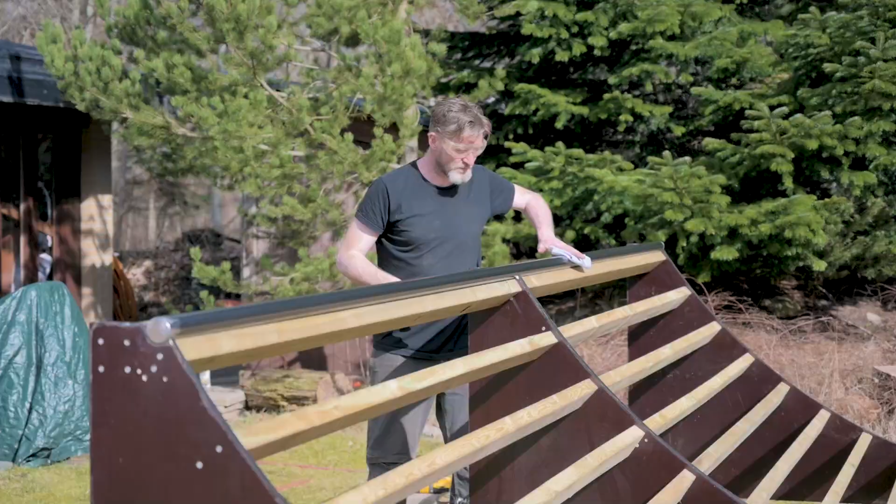Don't stop now. If you want to have the slickest possible coping for grinds, give it a spray with some varnish. It will make sure that the coping is really slippery even without waxing. And now when the coping is installed and you can actually measure distances from the coping to the next plate of plywood, you can start installing the plies.

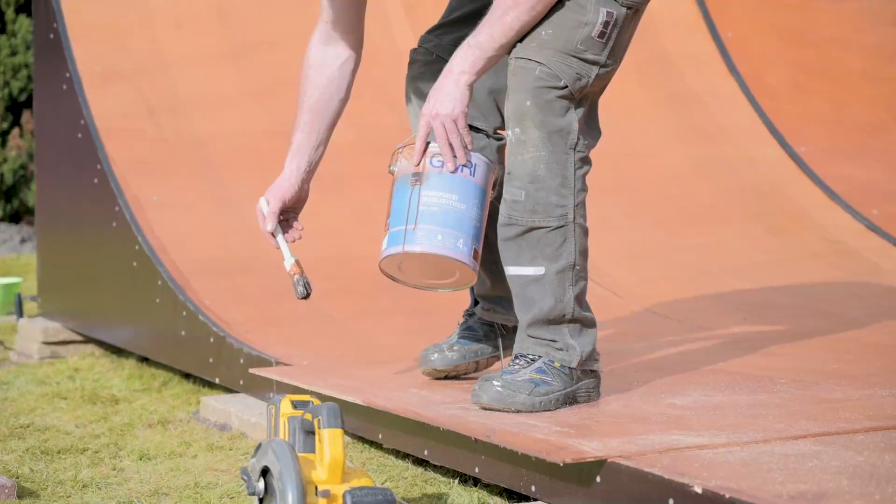The sequence in which we installed the plywood was: first we installed the 12mm plates on the flat part, starting from the middle and going to the outside. And then the same, starting in the middle and going to the outside for the quarter pipes. Measure a couple of times before you cut, and use the factory cut side to put the first plate against the transition wall, and use the cut sides to put together one with each other. Don't forget to add a little bit of paint on the cut side of the plywood.

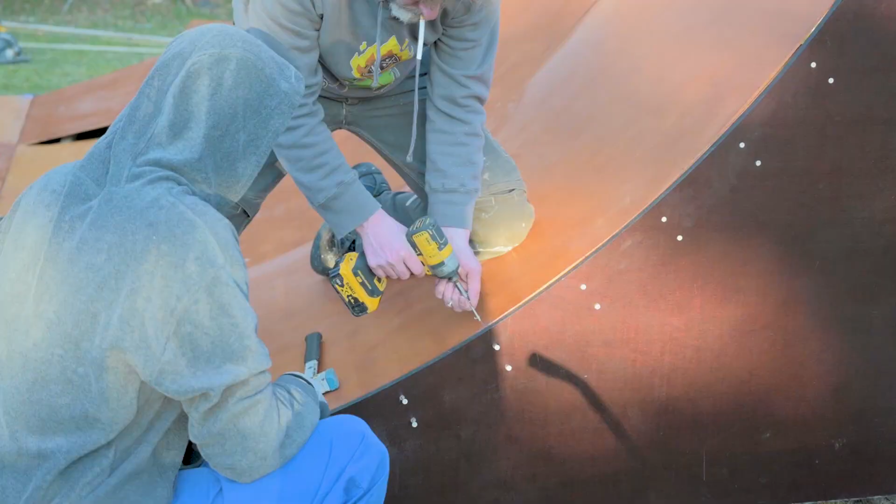If the fit is a little bit tight, you can loosen up the bolts on the transition side and squeeze the plywood in. The screw heads on the sides of the transitions will be the best marker to set up your chalk line and mark out where your horizontal planks are. Remember that for the first layers of plywood, you just need a couple of screws to hold them in place, because when you add the last layer of plywood, you will be screwing through all these layers of plywood, and it will be many more screws.

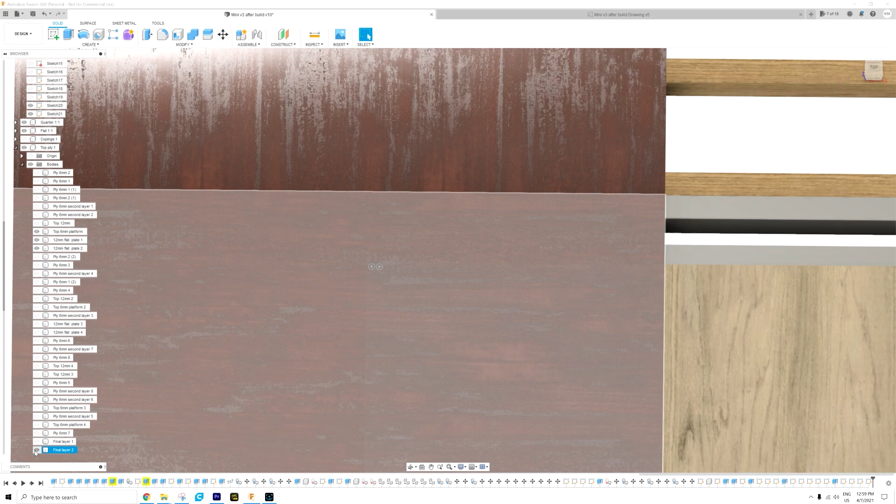At the same time, it's a good idea to leave a little bit of a gap from the edges of the ramp, because that's where you will be screwing the last layer of your plywood. You might find it a little bit hard to stand on the quarter pipes when screwing in the plywood, so just attach a couple of planks on the mini ramp and you have where to stand.

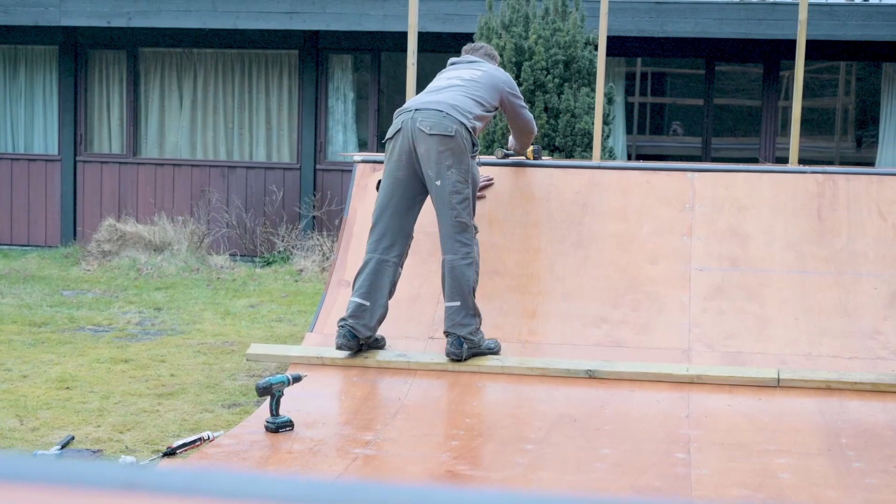Use a special drill bit to countersink the heads of the screws so they don't stick out, and also you don't break the top layer of the plywood into splinters. Also, instead of measuring the distance between every hole, you can just make yourself a little template from the scrap of plywood of the length that you need, and that will help you space the screws more evenly on the top layer.

After spending some hours of adding all the screws on the top layer, I painted the top surface of the mini ramp for the third time, and as I told you before, my ramp became a little bit too slippery, so I don't know if I should recommend doing that or not. I know that it's really water resistant now, but a little bit too slippery.